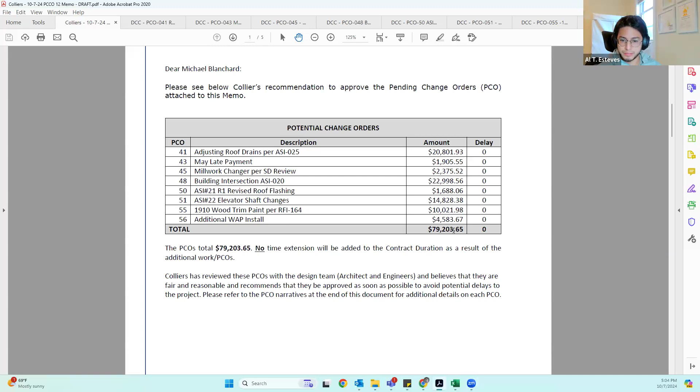There is no time extension associated with these PCOs, and we've reviewed them in depth with the design team, and their engineers were appropriate. We recommend approval to maintain the schedule. In terms of contingency, that 80,000 is about 3% of the contingency. Should all these PCOs be approved as presented tonight, we're looking to have about 1.7 million left in contingency.

Obviously, we have a number of potential PCOs out there that we're still working through, and the total potential exposure is 469,000. Worst case scenario, say those get approved, we're looking at 1.2 to 1.28 million left in contingency, which is about 52% of the original contingency.

Right now, as of August, the contractor is about 56% billed. We actually just received their September invoice, and they're about 68% billed. So the contractor's billed at about 68%, and we're tracking worst case scenario 52% left in contingency.

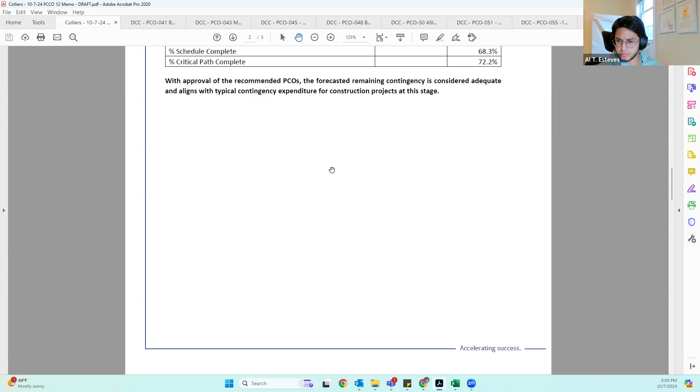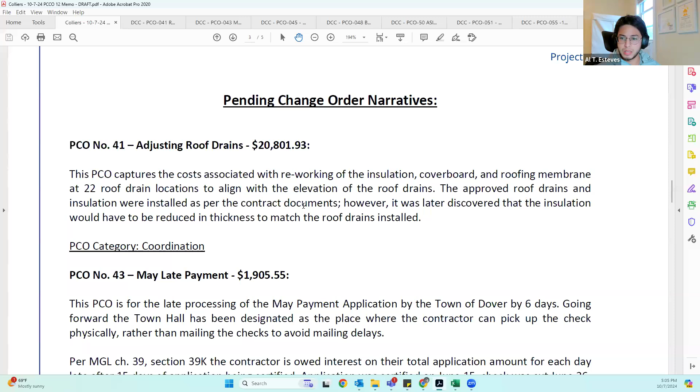So we can go ahead and get started with the first one. This is one that we've been going back and forth on quite a while, and I'm definitely going to need a little bit of help on this. Katie, from yourself, and Igli, I know you've been working on this as well. This is related to the roof drain. It's 20,800, and big picture, this captures the costs associated with reworking the insulation, the cover board, and the roofing membrane around the 22 roof drains, in order for the insulation to align with the roof drains.

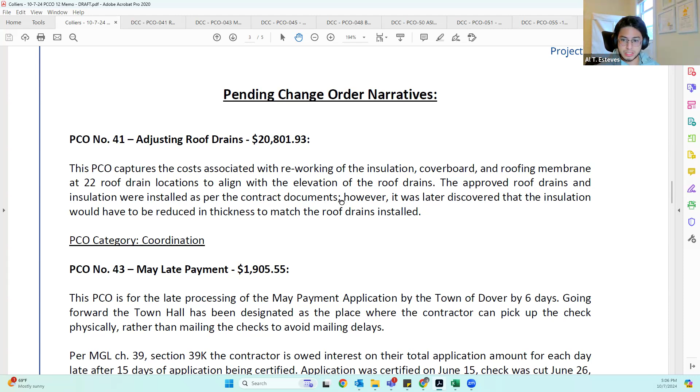So again, there's been a lot of back and forth on this one. Ultimately, the roof drains that were installed were per the contract documents, and the contractor said there was no blocking or anything shown to essentially make up for insulation where it needed to be extended. After the insulation had been installed along with the drains, that's when the team realized that there needed to be some reworking of that insulation. I do have all the PCOs open here, so if you want to dig into details, we can certainly do that. Do we have any questions, or do we need to dig into this one a little bit more?

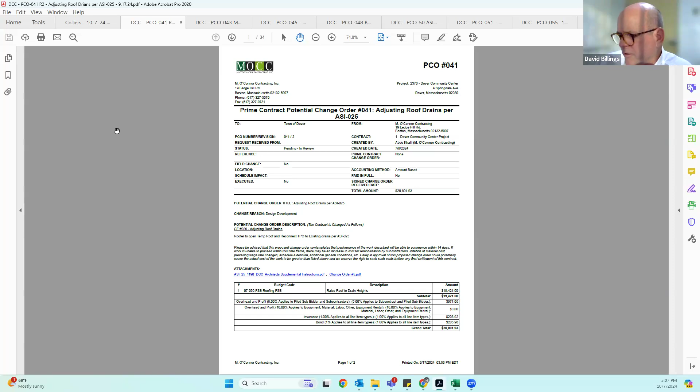I think most of you want to do it one by one or do the questions at the end, Dick? Let's hit these one by one. All right, and I think, of course, Al, if you could kind of elaborate on why this has come about.

Sure. So the contract documents showed the insulation tying into the roof drain, and the roof drains were installed. Then the insulation was installed after that, together with the cover board, and then everything was kind of temped.

The TPO membrane was temped in just to be watertight, knowing that there was going to be some rework because the insulation wasn't aligning with that roof drain. We looked at the option of essentially extending that roof drain rather than reworking the insulation down so those two could meet, but that was more expensive.

And again, this is the contractors arguing that the contract documents did not show any blocking or any mechanism to adjust that roof drain. Their argument is this was built per the contract documents, and those two weren't aligning. There's a lot of history to this one.

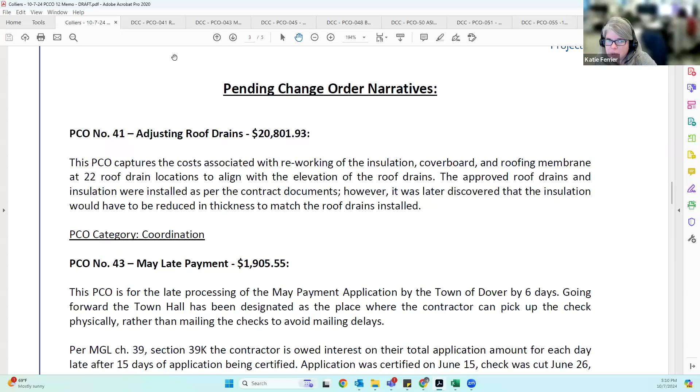Al, did we specify the elevations of the drains, or did we just specify high point, low point? Katie, could you help me with that one? Sure, David, are you asking about a specific elevation within the whole building? Yeah, let's show the detail.

Is the contractor owns coordination of his work. He owns coordination of the insulation and the roofing and the plumbing. So why is this a contractor coordination issue?

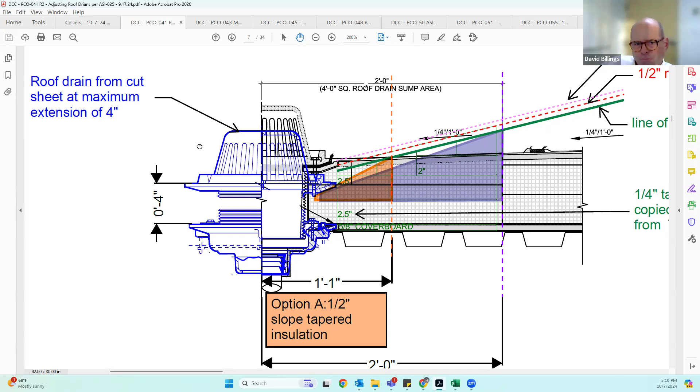So I think there's a couple of things happening, and I'll pick up where Al started. The design detail showed a roof drain that had an extension of 4 inches, so we would have 4 inches adjacent to it, and it would slope just like any other roof slope. Intentionally, the sump area is steeper than the rest of the roof because that helps the water migration.

Everything was submitted for plumbing-wise and installed ahead of the roofing coordination and roofing submittals, so there was a lag in that. There were multiple rounds of back and forth to say, hey, there's some language in the shop drawings that was not aligning with the other drawings. So, as Al said, this went through several rounds of review to figure out what the coordination was.

Ultimately, we had called out a Class A fire exposure rating, which caps the 1/4 inch slope. For our particular project, that's not a requirement, but it has to be for the building. Unfortunately, the testing mechanism requires that slope. So by the time we got to that part of the coordination to figure out that that was not required and the roofer could come back and amend the insulation, the plumbing drains had already been installed.

And the majority of the roofing had, as Al said, been temped out. So ultimately, removing the requirement of the Class A allowed us to have a steeper slope to get to that point. But realistically, the plumber started work well before the roofer, and by the time the coordination happened, there was just a lag in that work.

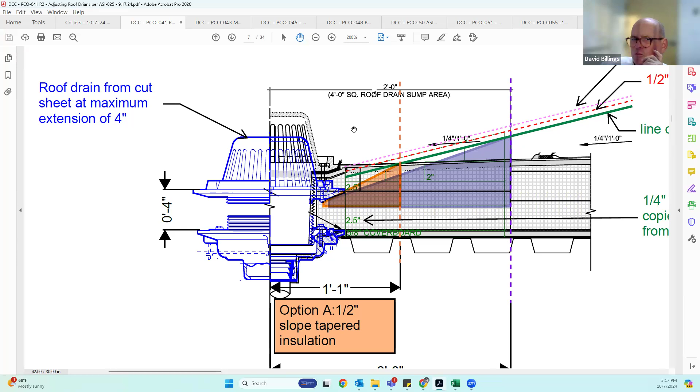I do believe they proceeded with this work just because they absolutely need to keep moving, at risk, knowing that. Let me ask you another question: what exactly are they doing? Are they cutting out the insulation and creating a pan, or are they raising the drain body?

So all the roof drains, I forget exactly what size, but around it that's where you start pitching in a little bit at a steeper slope. They're basically cutting open that TPO again. They have to redo this insulation, it's like a 4-foot by 4-foot area at 22 different locations, redoing the pitch of that insulation. So they're creating a sump, a steeper sump, so that the insulation can tie into the drains that are installed.

So they're not redoing the plumbing, just the height? Correct. We looked at that option instead of reworking all the insulation to extend all the roofing drains, so we could still tie into that insulation. But that was more expensive. It's just a collar extension.

This should be relatively simple, because it's just screws in. So you're saying a collar extension is more expensive than cutting open and redoing the insulation? We did evaluate that option and yes, it was just slightly more. So to answer Dick's question, we did look at this as if this was some roofing work, some plumbing work, or roofing and plumbing work.

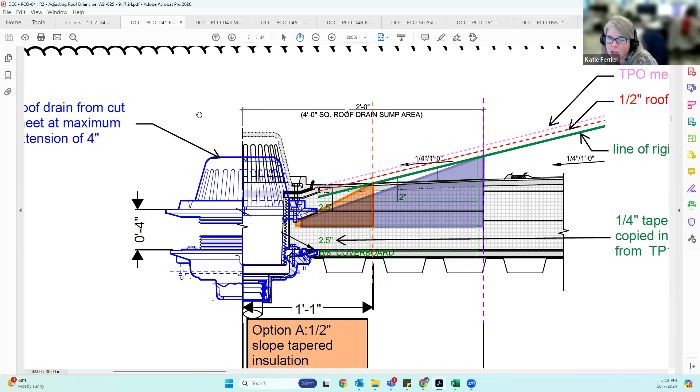And of the options of either additional blocking or an extension to that roof drain, as far as touching all the fittings - there's 11 drains and each drain also has an overflow, so as Al said, there's 22 locations. This one was actually more affordable than the roofing drain extension kit.

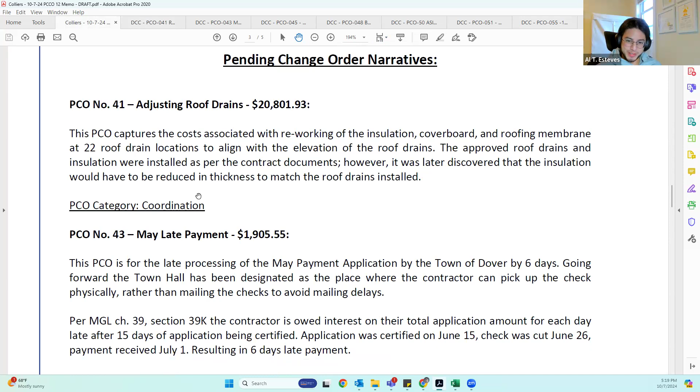Yeah, all right. Some of the other ones will be more straightforward than this one, I promise. Yeah, this one we've been going back and forth on for a while. There's just been a lot to that one.

Any more questions on this one? No. Okay, this one - late payment, $1,900. The contractor first was asking like 5,000, but the dates were incorrect.

After we submitted the invoice, it had been certified and approved, and once it was submitted to the town, my understanding is there was some sort of miscommunication on the town side of things, and it took a little bit longer to get that payment to O'Connor, which is why they're asking for interest on that late payment.

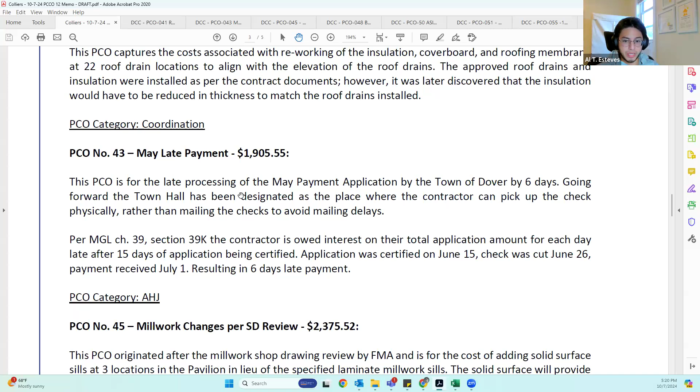To avoid this going forward, what we were doing before was mailing the checks out to the contractor. What we're doing now is establishing a designated place - we can do this per MGL - so the contractor can just come pick up that check as soon as it's cut, so we don't have that delay. I'm also working with the town administrator on the payment schedule to ensure that, based on when the building committee meeting is and when we get it approved, the timelines work.

But we actually reviewed this with Nina, the town legal counsel, and she thinks it's a legitimate change order per MGL. Again, there was some miscommunication on the town side of things - the first time this happened, so I don't foresee this happening again.

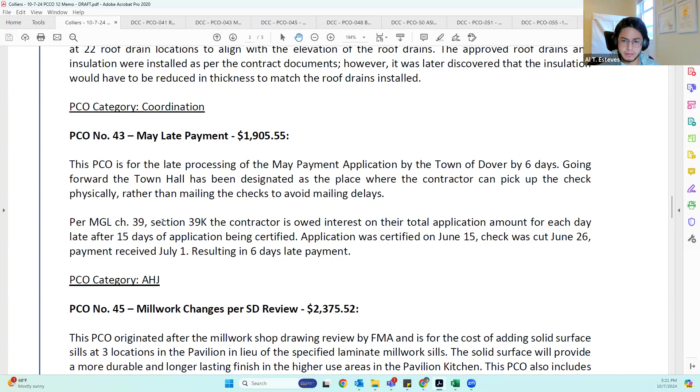So O'Connor's really asking for interest? Yes. What rate are they asking? It's 3% over the bank rate, which is the law. So it's 8.5%.

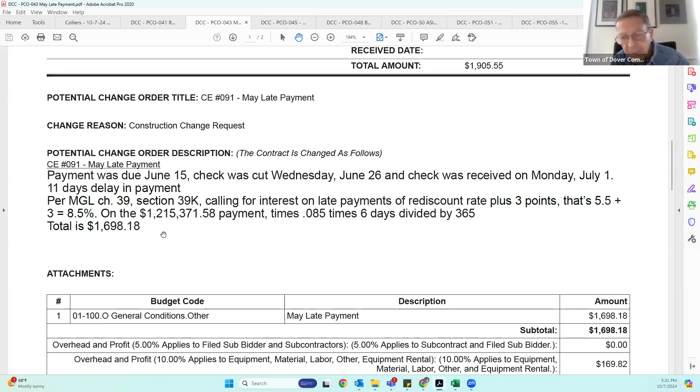Due 15 days after the certification? Correct - certification by the BOS, or... it's actually 15 days, not after the pay app is certified. I thought it was, but I went to read the MGL language - it's 15 days after the final pay app is received.

So we receive it, then we have to review it to make sure they haven't changed anything since we approved it. Then it goes to the architect to get certified. Then it comes to Colliers to process it, to get an approval stamp, and then it goes out to the town.

So we did that entire process in a matter of like 2 days. Then it went over to the town - it goes to the building committee, and then it goes over to the town.

Well, what's the actual act of certification? When does that take place? So the certification happens once we get the draft version - we look at it, give the contractor our comments, they revise it, and then send the final one.

Once they send the final one, we'll look at it again, make sure nothing else has changed, and then the next step will be for it to be certified by the architect.

Okay, so it's like the Prompt Payment Act? Yeah, it is. I usually push back the contractors, file a claim if you want, pay it at the end. We don't want to set a precedent in case we want to dispute some of the change orders.

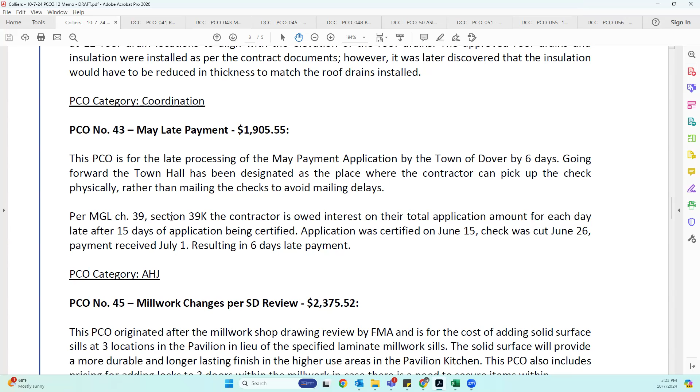Yeah, I thought the town had 30 days to pay. No, but the law gives the state 30 days - municipalities have 15 under the law. But no one does, no one pays it.

It's pretty tough to get this turned around in 15 days. You gotta go through 2 separate committees, plus a procurement process. So if they're gonna be that way, I'd let 'em know. Was it placed in the mail in time? Was it actually put in the mail? No, the delay wasn't because of the mailing. It was getting it approved on the town side and cutting the check that took a bit longer.

Well, I haven't read chapter 39, section 39K, but some of these statutes are a little ambiguous. You think that one is pretty clear, Dave? No, actually, defining exactly what certification means is a little up in the air. It doesn't really state it. Yeah, that's the thing, it doesn't say. I usually say certification is when the town approves it.

Which is after the board of selectmen, but they can dispute it. That's why I tell them, file a claim. If they want to pursue it, they can do that.

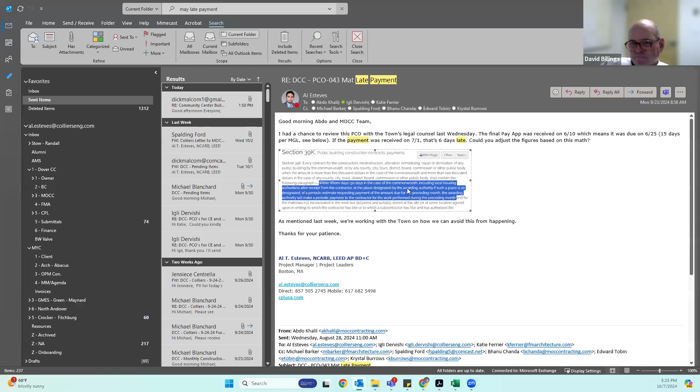So that would be the outside date you'd aim at, when it's actually approved by the selectmen. Well, it doesn't really say that. After receipt from the contractor. So it doesn't say certification, and I thought it was when it was certified, but what it says is after receipt from the contractor. But you gotta approve the receipt. It's when the town approves it. That's what I always do.

Well, it sounds like it's arguable, so if you want to not set a precedent and hold it up, I guess you have an argument. Yeah, we looked at this with Nina, and she thought the contractor was entitled to this interest, but we also probably agreed we owe it - that doesn't mean we give it to them.

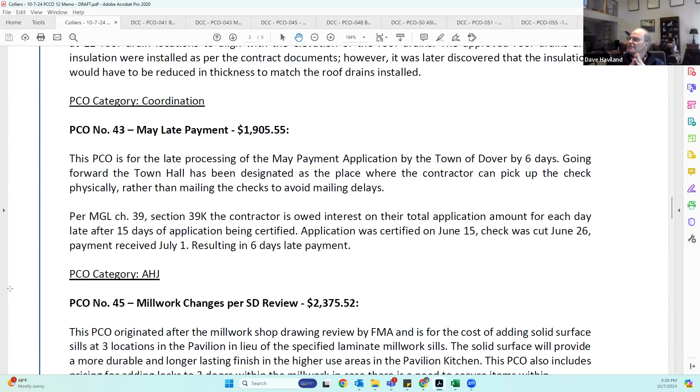Yes, Dave Haviland. It seemed to me that this interest was almost a reaction to our pushing on them on the time, so to me it's more of a tit-for-tat reaction. And I definitely agree we should not be setting a precedent here. If they want this PCO, it certainly isn't going to hold the project up. Yes, I agree it's 1,900, but I don't want them dinging us every time we're 15 minutes late issuing a check, given the fact that it was the summer.

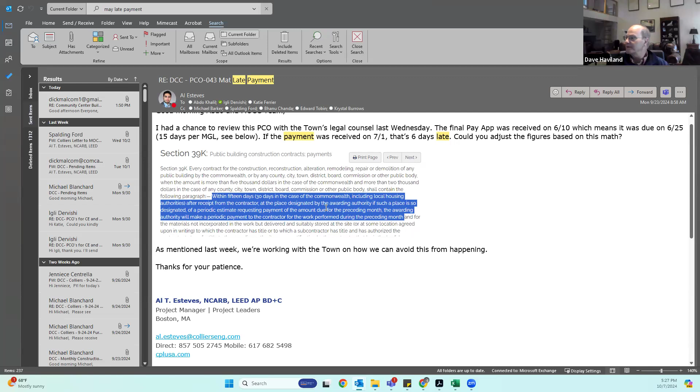There is the review process, and there are 2 committees that have to meet to do this. What I'm interested in is who is the awarding authority under that wording you had up, Al? Is the awarding authority you, the building committee, or the Board of Selectmen? Because if the awarding authority is the Board of Selectmen, we have more time, and the 15-day clock doesn't start until after the awarding authority. I read it really quickly, and here it is again.

Well, we've gotten a couple of different answers. One was that it was certification by the architect. But if we're talking about the BOS, then it would be a later date, right? That's my question, I don't know. Maybe we should reconfirm with Nina.

Nina, as great as she is, there are times when she's busy and she'll just give this a cursory review and say, all right, we owe them interest. But do we? And again, since we're in a dispute of at least several months at this point, I think we just don't pay this until all this goes into one big bucket. This would be in their favor, and we're going to have some in our favor, and let's see where the chips fall. That would be my humble opinion.

Yep, thank you, David. Okay, any more discussion on this, on the PCO 43? No.

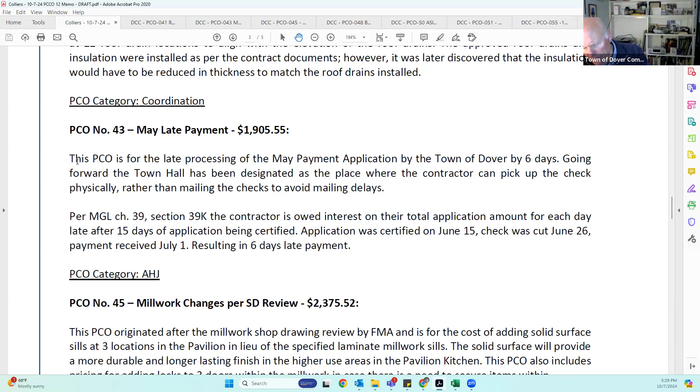So Al, what I want to do is backtrack, and I'd like to vote on each of these separately. Okay, so I'm going to backtrack. Is there a motion to approve PCO 41, adjusting roof drains per ASI 025, in the amount of $20,801.93? Is there a motion?

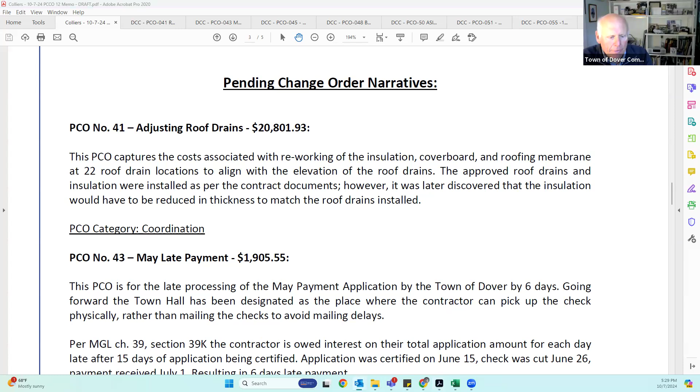Is there a second? Second. Those in favor of the motion, I will poll the board. David Billings, yes. Luciano, yes. Barry, yes. And I am a yes as well.

Okay, now let's go to PCO 43. Is there a motion to recommend for approval PCO 43, May late payment, in the amount of $1,905.55? Is there a motion?

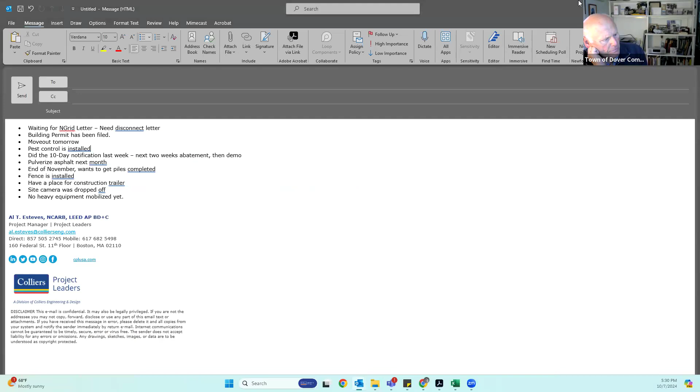I would motion to table it for future action. Is there a second on that? Is that to table? Second. Okay, I will.

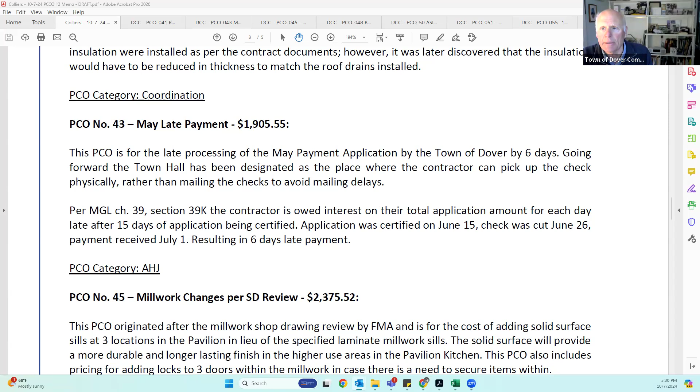We'll have a vote for those in favor of tabling the motion to recommend for approval PCO 43. Poll the board: David Billings, yes. Luciana, yes. Barry, yes. And I am a yes as well. Okay, thank you. Al, next.

Right, next we have PCO 45. This is $2,375, and I categorize this one as an owner request. It's a betterment to the town. Part of it is, after the millwork shop drawings were approved, we're recommending providing solid surface instead of PLAM or plastic laminate at a number of millwork sills. It's a much better product, much better lasting. And then there's also a part of it that it's adding locks to 3 doors to secure items. We can get into more details if we need to.

What is the solid surface? So I can pick this part up, Dick. For the majority of the pavilion space, we have a solid surface at the windowsills, kind of an off-white cream stone. There are 3 locations we had called out as more in line with the rest of the building, which is painted wood. So the majority of the building on the interior has drywall returns and a painted wood windowsill. As part of the shop drawing review, we flagged 3 locations, mostly in the cafe, where we said there's a good chance someone's going to set down a cup of coffee. The painted wood is totally fine, but it will likely need to get wiped up and cleaned. So we thought the solid surface was a reasonable thing to propose as an upgrade.

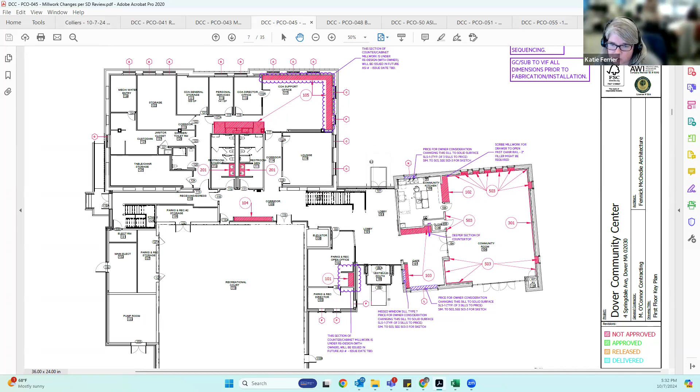So the numbers here would be the delta between painted wood and solid surface. Al, I don't know if you have this PCO open, because I can just point to the plan if that's helpful. Go to page 7 or 8. Yeah, there, that's perfect, thank you. So there's the window within the kitchen at the top of the pavilion, and then the 2 windows in the cafe, facing the fields and also facing the vestibule. Those are the areas, particularly in the cafe, where people are going to be hanging out and sitting, and there's all the millwork, where you have a coffee station or snacks or whatever. So that was part 1 of this PCO, and the second part is the millwork in the cafe.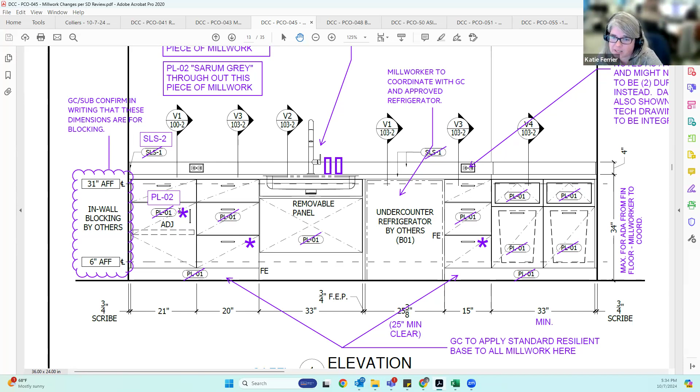All right, thank you, Katie. I assume the solid surface won't get stained by coffee or a wine glass or anything. Good point. We have the solid surface in lots of other places as a countertop surface, so you're right—it's going to be a little bit more durable in the sense of hiding the signs of being used.

Okay, so the solid surface, what is it, is it a stone? Sorry, I don't have a sample in front of me. I believe it's Corian material. It's applied, and it lasts much better, it doesn't delaminate like PLAM, which is sometimes just a layer of plastic on top of MDF. It's a much better product.

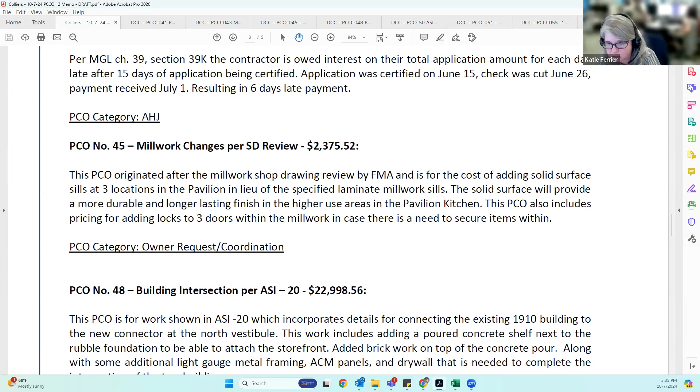I guess in the end, Dick, these are both things we considered a betterment, upgrading the scope we already have. These are recommendations that will help the operations of the building, but otherwise we have all this scope covered. We have millwork actually in fabrication right now, and the window sills will be installed probably in the upcoming months. Okay, good, thank you for picking up on that and making that recommendation.

Any other discussion on PCO 45 millwork changes? Nope, okay, if not...

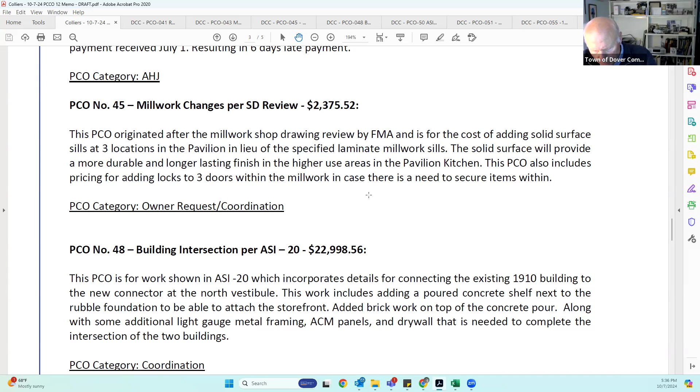Is there a motion to recommend for approval to the Board of Selectmen, PCO 45, millwork changes per SD review in the amount of $2,375.52? Motion, second. Okay, those in favor of the motion, I'll poll the board.

David Billings, yes. Luciana, yes. Barry, yes. And I am a yes as well.

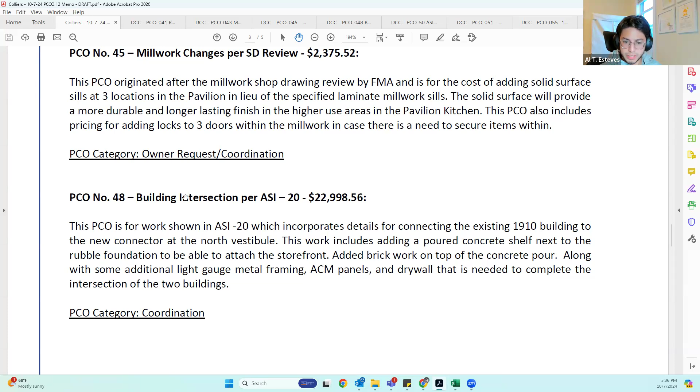Okay, PCO 48. This one resulted from an ASI, an architect supplemental instruction, that clarified the intersection from the 1910 building to the connector piece, specifically at the north vestibule. We can get into the details. The clarifications added concrete that needs to be placed at that fieldstone foundation, plus additional brick, light gauge metal framing, ACM, and drywall to finish that intersection. And the amount is for...

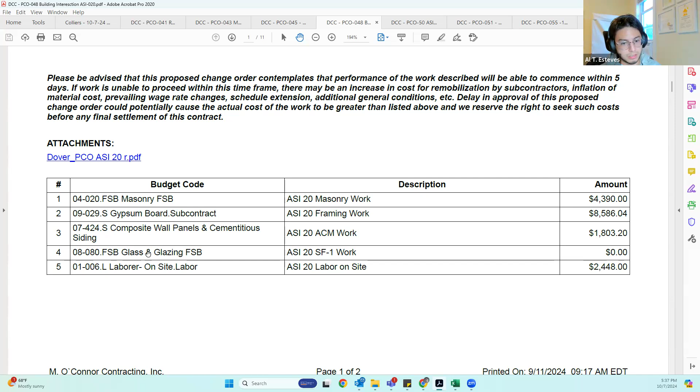$23,000. I can go to that PCO. Like I said, there's a number of trades involved here. We've got the mason, gypsum drywall, the ACM panels, storefront changes, and then concrete work as well.

Let's see if we have a drawing that shows that. I don't know, Katie, if there's a good drawing we can show. If you want to zoom in on the photo on the right of the page, sort of in the middle, within that cloud. Thank you. So, ultimately what you can see is, as I said, we had the rubble foundation, really at grade.

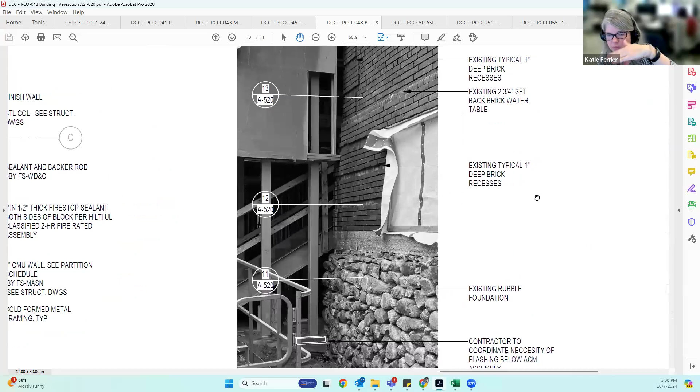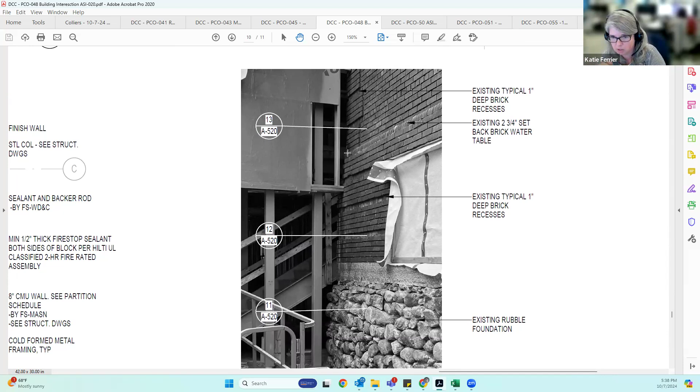Then we get into the granite block, we have the brick, and obviously the brick is corbelling and doing some ins and outs. Then when we get up to about the top of the first floor, second floor, the wall steps back because it goes from four wythes into three. So we also have the water table brick there, which is kind of the curved one. There's a series of different sections, building conditions here, and ultimately we're trying to connect the new construction to the existing building.

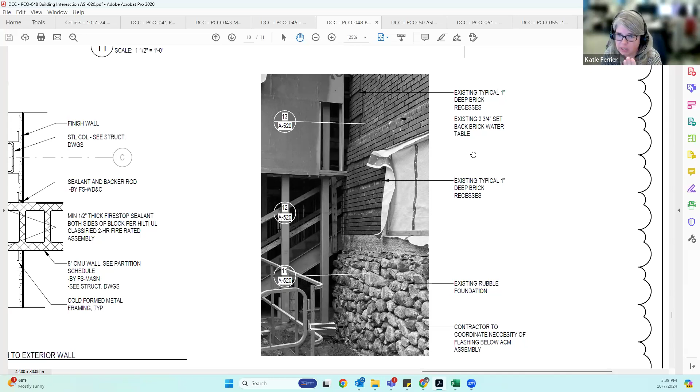Some of this was generally understood based on the previous documents, some of it was better seen once the previous 1970s building was demolished. There were a couple of things attached to this corner, some other concrete walls had been poured on, but ultimately this is just more fussy, detailed work to connect the new building to the existing one, both continuing the envelope and the air barrier, and then continuing it all the way up. So what you don't see in this picture is kind of an extension of the metal panel that goes up, and then tying in that roof detail.

So what we have here, just to the left off this page, is a storefront. We've got glass and doors, and we're trying to connect something very linear and straight with an existing building which has lots of ins and outs. So basically the detailing, there's some concrete being poured at the base to mitigate the rubble, and then additional framing going around to support that. A little bit of ACM metal panel, that's above the storefront system, and the brickwork is really just toothing in some pieces that work within the existing corbels and brick detailing. That's probably what some of these other plan details are, but this photo probably really just shows the condition.

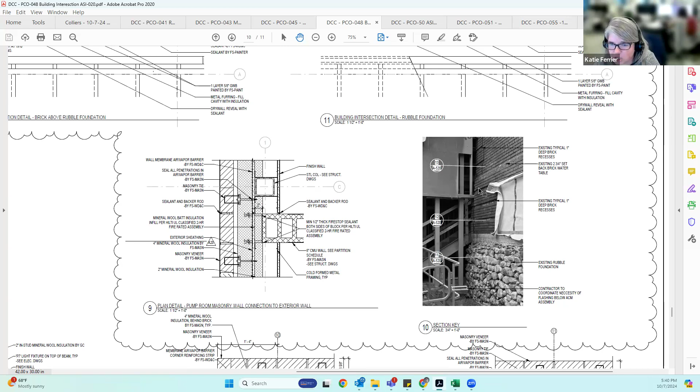So from the contractor standpoint, none of it was shown how to do it on the plan, though they knew they had to tie this in. So all of these you see here are new details issued as part of this ASI. As far as we have storefront scope, repointing the existing building, other details as far as that scope, but there wasn't something as specific as this where we went through all levels to say this is all the ins and outs of what's needed to connect these buildings together.

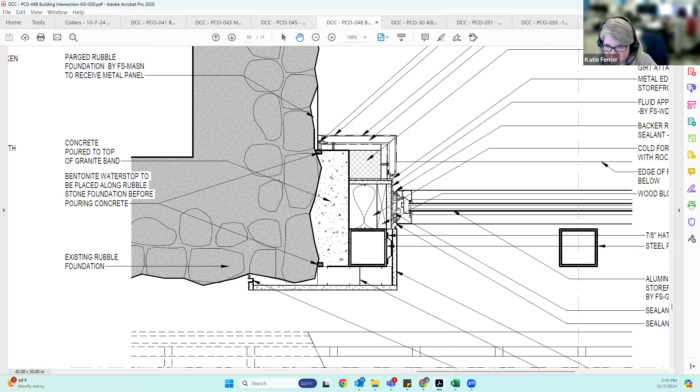So as part of our review, we went through and highlighted the scope that was contract owned, and could eliminate that right off the bat. The pluses and minuses here are more of the fussiness - the metal panel, the storefront, other work, even the drywall.

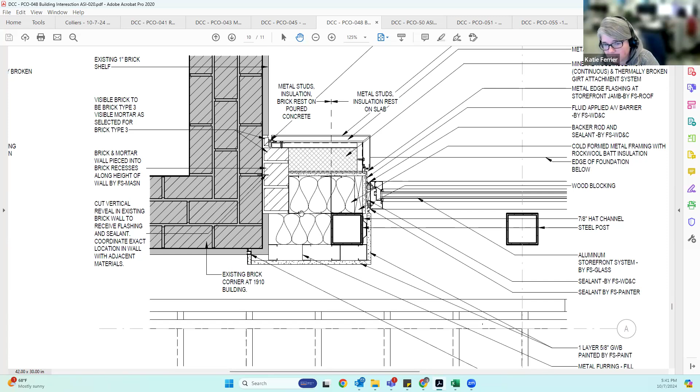A lot of that was contract owned, but some of this is reworking it and really working with the existing condition. So a question to Colliers - in your analysis of this PCO and the 22K or 23K, did you really flush out - I mean, the contractor obviously knew they needed to make a connection.

Was that accounted for in arriving at this number? Yes, 100%. I know Eagle was going back and forth on this one quite a bit, digging more into details with Katie. But that's something we would definitely compare against what's inferable in the drawing, because typically the contractor owns something that's inferable. Part of the exercise is addressing what's inferable from the drawings versus what's legitimately new and added to the scope. I know there was a lot of back and forth on this one. Eagle, if you want to add anything.

Yeah, we went back and forth with them for a number of weeks, going over the details. When they submitted the original scope, we had the subcontractors clarify what they owned on the original drawings, making sure they weren't essentially double dipping from the new work to the old work.

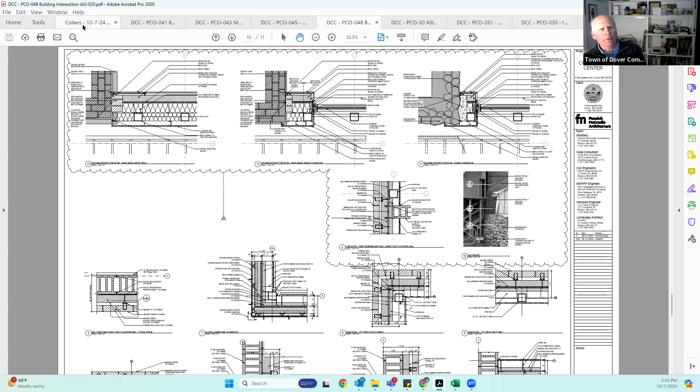Any other questions on this PCO? Okay, hearing none.

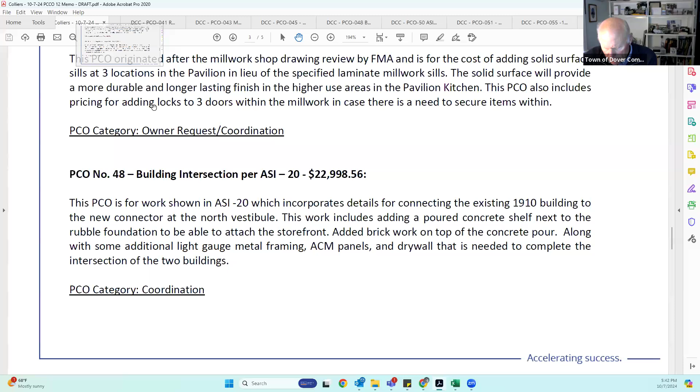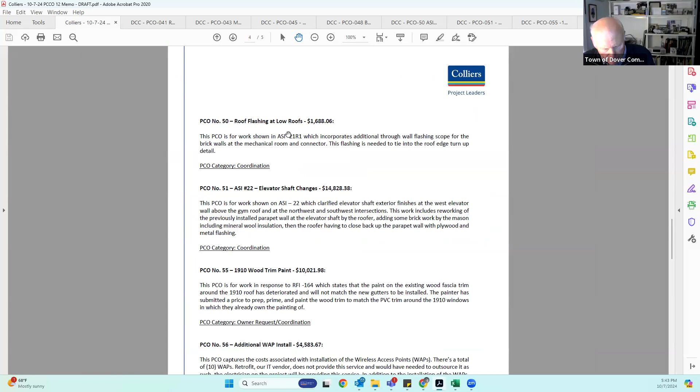Is there a motion to recommend for approval to the selectmen PCO 48, building intersection ASI-020, in the amount of $22,998.56? Is there a motion? Is there a second? Is there a second to the motion?

Second, I can do it. Okay, thank you, thank you, Luciana.

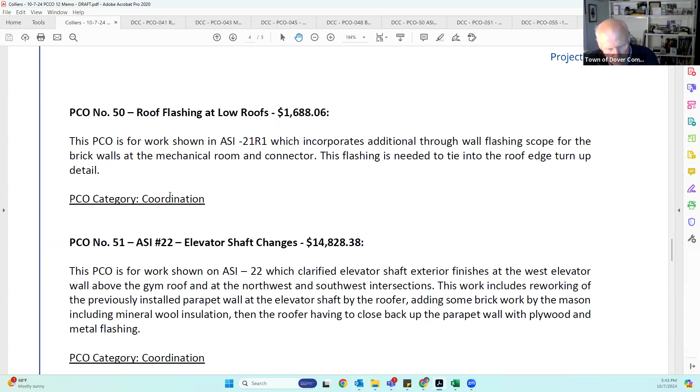Those in favor of the motion, I'll poll the committee. David, yes. Luciana, yes. Barry, yes. And I'm a yes as well. Okay, thank you.

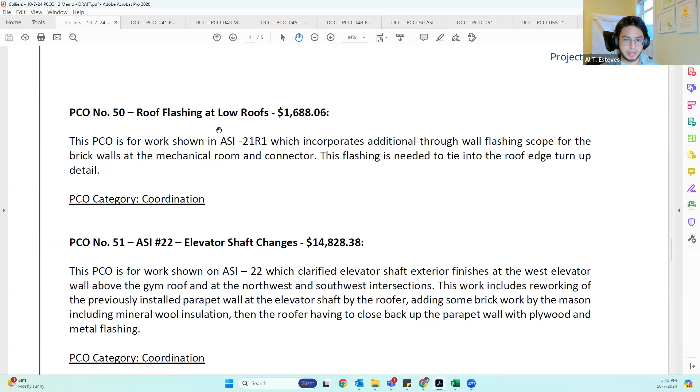PCO 50 - it's for $1,688.06. Essentially, it resulted from ASI 21, which added some through-wall flashing at the brick walls at the mechanical room and the connector. This is needed to tie in the roof edge turn-up detail. Go to that one.

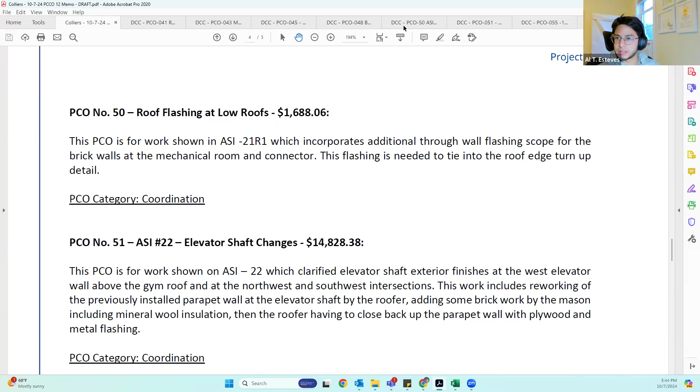So Al, if you go back one page, I can point this out. There you go. At the second section from the right, if you zoom in the middle, there's a cloud around the callout. This is areas of the gym that are tall, adjacent to a low roof.

As far as the typical brick detailing, we've got scope by waterproofing, dampproofing, caulking, additional scope by mason who's doing the majority of through-wall flashing. The revision here is to add a two-piece reglet that connects between those two trades. This is provided by the roofer, and we're handing off to the mason, who mortars it in. So it's some additional labor for them to install the flashing that the roofer is handing them.

In contrast to other details in the building, this is very typical to what you'd have at grade. However, we do have occupied space below, so we wanted to make sure - this is a more sensitive area - that this is a betterment to that detail, upgrading it so it really ties everything in.

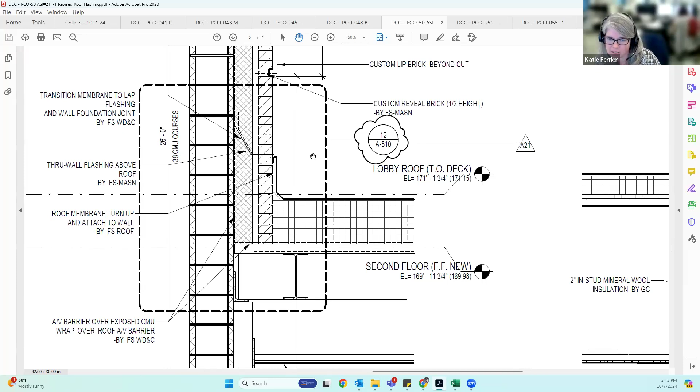On the next page is just a callout of that, but ultimately this is labor - time for the mason to take the reglet from the roofer and mortar it in, as opposed to doing their trades separately. So this is more of a belts and suspenders approach - it is a betterment.

The question came up initially of what's the intent here. We vetted this and believe the scope was owned - there's multiple trades doing some work, and there was a bit of two trades getting to the point of saying, who does the scope in the middle? That's where this two-piece reglet seemed the best fit for this particular area. We don't have a plan here, but as Al said, it's basically either side of the gym, where we have a decent amount of low roof coming up to a higher roof.

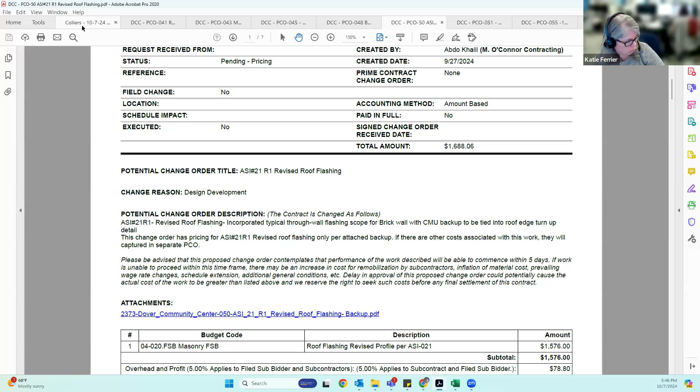Okay, thank you. Any other questions? Okay.

Is there a motion to recommend for approval to the Board of Selectmen PCO 50, ASI number 21, revised roof flashing in the amount of $1,688.06? Is there a motion? Motion. Is there a second? Second. Those in favor of the motion, I will poll the committee.

David Billings, yes. Luciana, yes. Barry, yes. And I'm a yes as well. Thank you.

Okay, Al? The next PCO is PCO 51. That also is a result of an ASI that was issued. ASI 22 is for $14,828.38. This ASI essentially clarified the elevator shaft exterior details above the gym at the northwest and southwest intersections.

And the work included reworking of the previously installed parapet. So there was some rework there at the elevator shaft by the roofer. There's also some work by the mason to add some brick insulation, and then closing the parapet back up with plywood and flashing. That's PCO number 51.

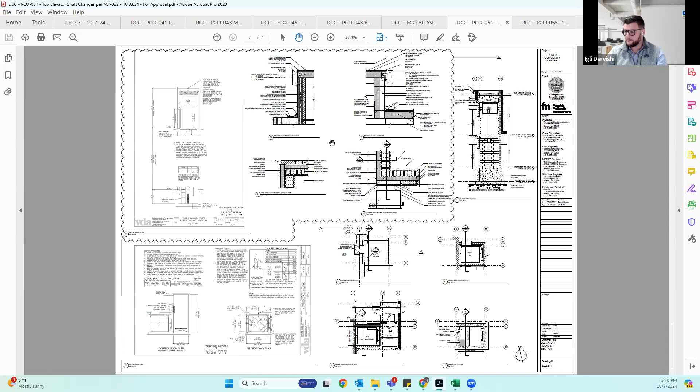Yeah, I guess Al, if you could just zoom in on the area that's clouded. So as you said, all of these are new sections, more specific detailing to show the overlap of various trades. This is the majority of this work, really is the roofer just being able to tie in those connections. So as far as the work that was owned, there was quite a bit of work that's owned as far as the contract scope. What's being shown here is tying in and doing some of the fussy detailing.

I will say on the west elevation, we don't have brick. So in order to really tie the brick, the roofing waterproofing up onto that wall that does not have brick, we did add some framing and some plywood, and then also wrapping that in from the side. So as far as the roofing scope, and this one's a good one, there was a little bit of demolition of the parapet wall that had been built to be able to pull that back and then tie in.

So this is a whole lot of 2D drawings. It's kind of hard to see this in 3D, but really we have the gym wall to the left, the elevator in front of us, and we're trying to connect several connection points and different various slopes in one spot, all around the elevator. It has nothing to do with the actual elevator inside, it's just closing in that shaft.

So my question is, I'm just curious why it wasn't detailed in the original bid set. So I think that we had the majority of the scope covered as far as the typical detailing. I will say the west elevation, I would say, is atypical. We didn't have brick there. It's a short wall just above the gym roof. We didn't have steel there to hold brick. So that's the atypical detail here.

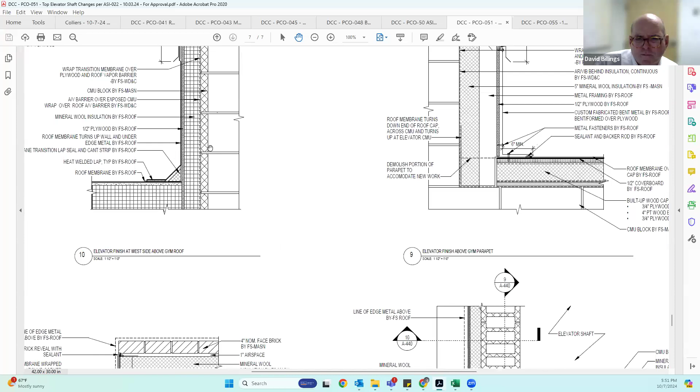And that's exposed to public view? I mean, is that why we got brick, as opposed to just rubber? Good question. So the elevator is just to the east of the gym. So what you're seeing is really just the TPO that's exposed to the gym roof. So it's not really visible, I mean it would be visible to you if you were standing on the roof, but from grade - that I'm asking, why is there brick at all? Why isn't it just wrapped in rubber, or the TPO?

The other three sides of the elevator are wrapped in brick because you can see those from grade. So, let's see - I don't think I have... well, that elevation is in the middle of this view.

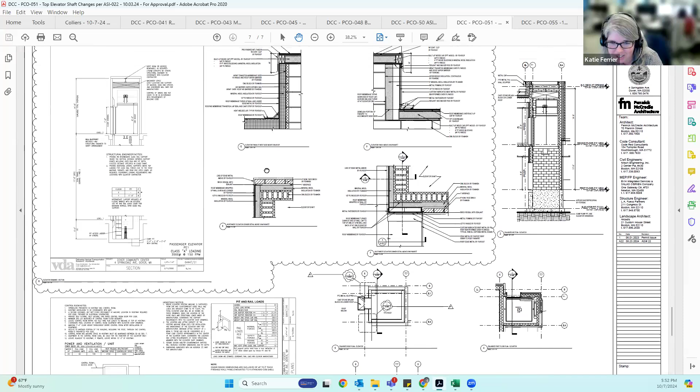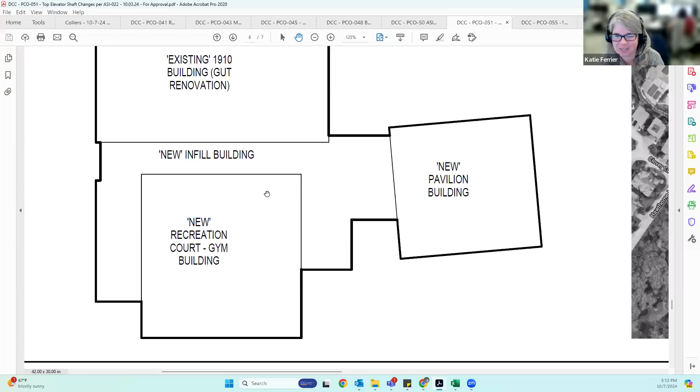Let's go to the floor plan. Go back one page to the cover sheet—it's not quite the right view, but if you zoom in, go up to the perspective view. Sorry, I'm pointing with my hand, not using real words.

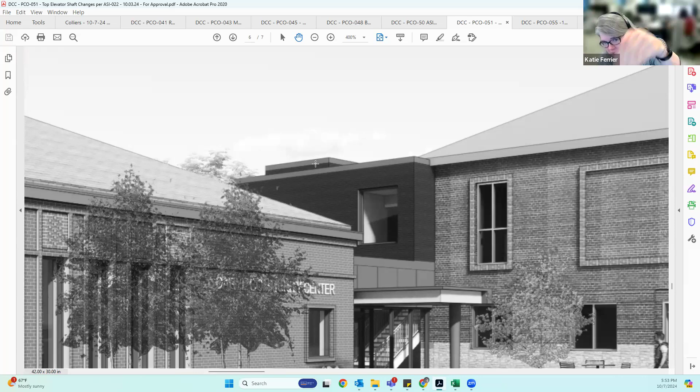If you want to stand in this spot at the end of the project, we'll see it in the rendering. When we're looking at the east side, the west side—which you can't see from here—is the one that doesn't have brick. That's tying into the gym roof on the other side. It's really a lot of planes coming together at one place, trying to tie them all back to the waterproofing.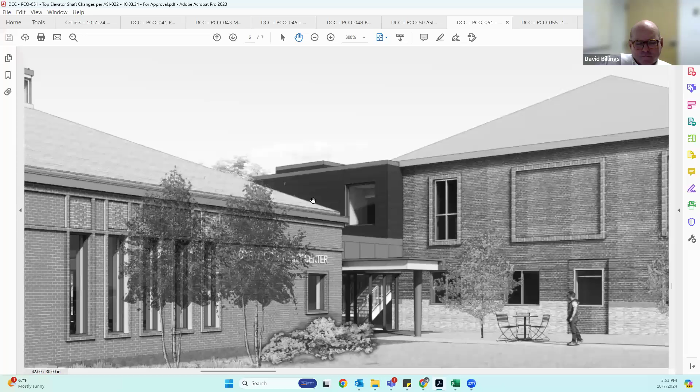Thank you for driving, Al. Oh yeah, they got it.

So this is scope which is not owned by M. O'Connor. We coordinated what's new versus what's not new, because they did own something. So there was a lot of back and forth on that.

Any other discussion on PCO 51? If not, is there a motion to recommend for approval to the Board of Selectmen for PCO 51?

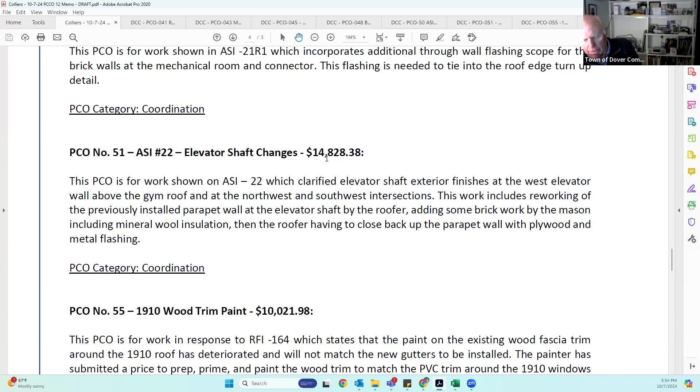ASI number 22, elevator shaft changes in the amount of $14,828.38. Is there a motion? Motion. Is there a second? Second.

Okay, those in favor of the motion, I'll poll the committee. David, yes. Luciano, yes. Barry, yes. And I am a yes as well.

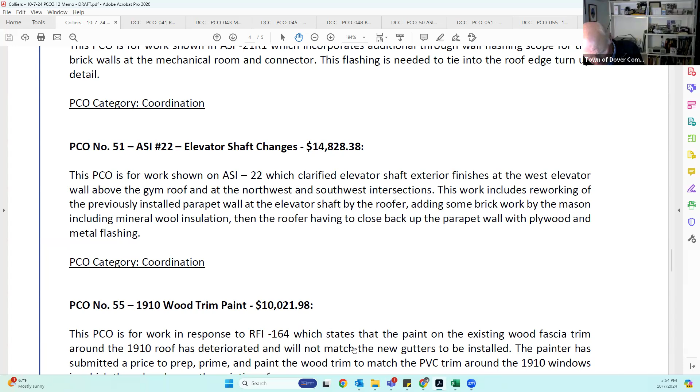Thank you. Okay, Al, next, PCO 55. So PCO 55 is for just over $10,000, associated with the 1910 building. It's around the existing wood fascia trim—it's deteriorated and the color will not match the new gutters that are going to be installed. The project team is recommending prepping, priming, and painting this wood trim to match the new PVC trim around the 1910 windows.

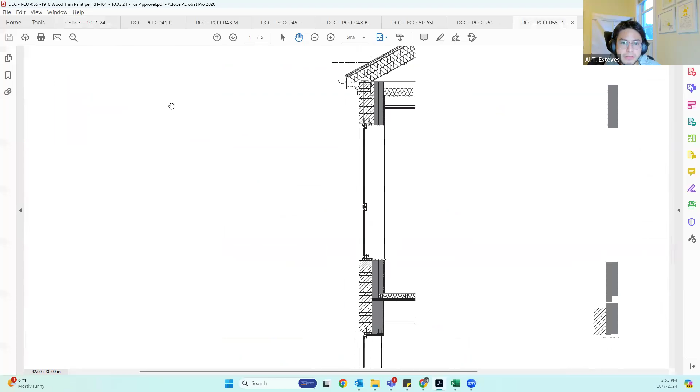We can get into the details. This is going to show what that trim work is—the piece that would be prepped and painted. We didn't have that being painted previously—it was scope we didn't have in the contract set. So you can see it's a new gutter, and we have some new vents in the existing, and we basically amend the existing.

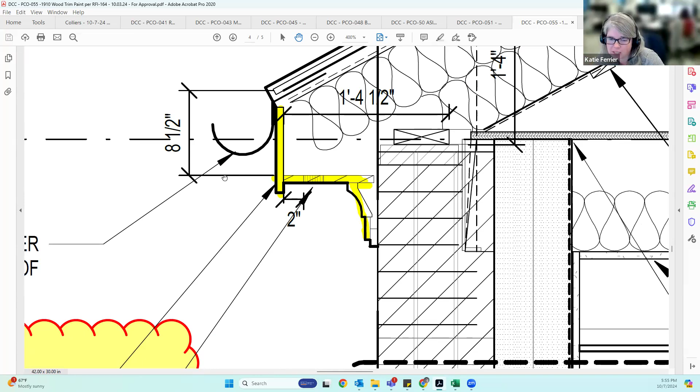But you've got the fascia, the soffit, and the trim that's going along the brick. That's generally the scope, and we have three sides of the building. I think this came from the GC, and it was a good question to ask, hey, before we get too far, are you sure you don't want us to paint this? That's really how this came up.

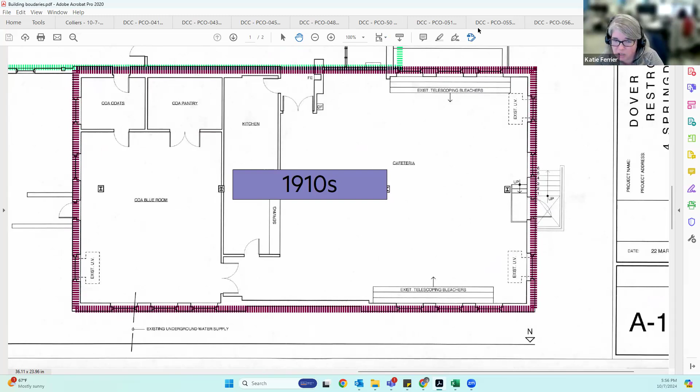As Al said, there's some gutter work, some vents, and other things. Given the scope, I think it was something in the order of 60 man hours for doing the takeoffs with some lifts. It seemed like this is definitely a betterment, and a reasonable time to do that work. I agree—if you're going to touch it, you want to paint it. And if it's part of the bid, if it doesn't call out to be painted, we don't own painting. Correct.

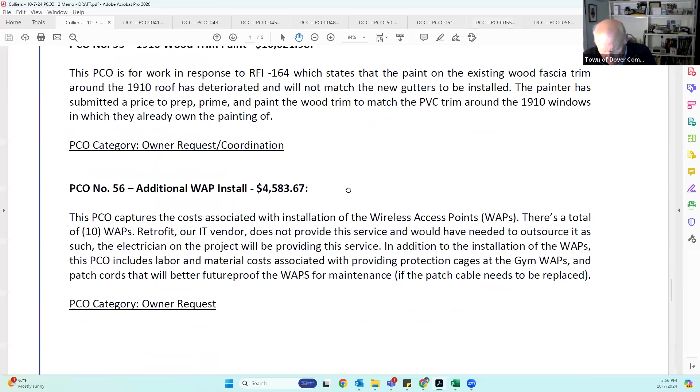Any other discussion on PCO 55? If not, is there a motion to recommend for approval to the Board of Selectmen for PCO 55, 1910 wood trim paint per RFI 164, in the amount of $10,021.98? Is there a motion?

Motion. Is there a second?

Those in favor of the motion, I'll poll the committee. David, yes. Luciana, yes. Barry, yes. And I'm a yes also.

Okay, last one, PCO 56. Yep, PCO 56 is for a WAP, a wireless access point. These are the Wi-Fi routers around the building. There's a total of 10 of them.

During one of the coordination meetings with Retrofit, the IT vendor, with the electrician and the contractor, Retrofit mentioned that they do not own installing the wireless access points, and that's also not a service they provide. They would have to outsource it to somebody else, and rather than bring a third company in, who would probably be more expensive and have to mobilize on a new project, we asked the electrician to see if they could price it.

There are other components to these, not just installation of the wireless access points, but there's a couple of cages to protect the wireless access points that are going to be in the gym, to protect them from basketballs, etc. That was also not owned by Retrofit.

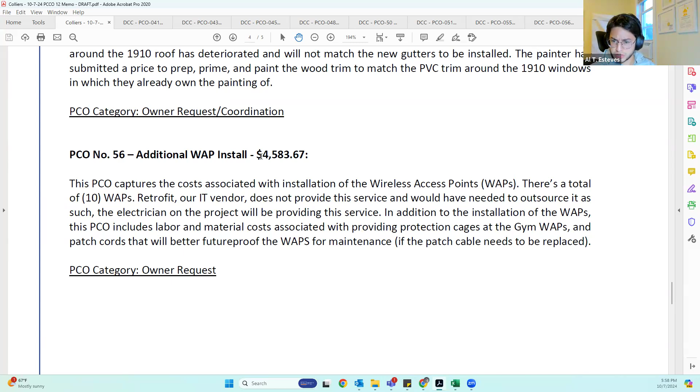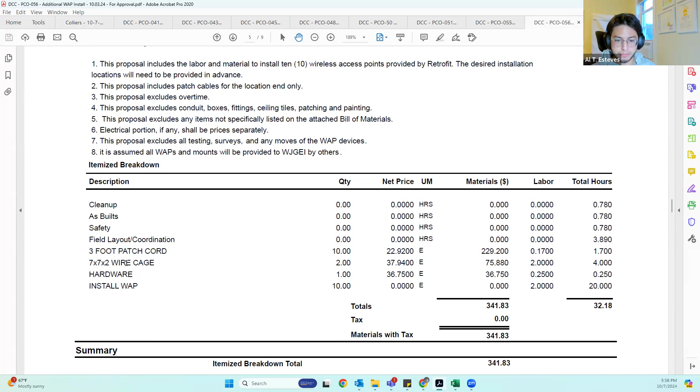So the total is just over $4,500. Here's a breakdown from the electrician, WJ Griffin: cages, patch cables, and installing of the wireless access points.

Were there originally wireless access points specified in the bid documents? Yes, the bid documents show where the wireless access points were going to be, but they were not owned by the contractor. That was always going to be a direct owner vendor scope. Retrofit is providing the wireless access points, they're just not installing them. They are pulling the wire and doing the programming, but this scope wasn't specifically owned by Retrofit, and they also do not provide that installation service.

Isn't it usually that the wiring is done by the electrician? I would have to go back and look at it. I thought the infrastructure was definitely being done by Griffin, and I thought they were doing the pulling of the wires. Yeah, I could go back and confirm that. I've never seen where you have a patch cord to them. I mean, the cable rarely goes bad, but...

So this is not additional. There's 10 access points in the building, we just never bought them. Well, we never bought installation of them. Installation of them, yeah, that's right. Okay.

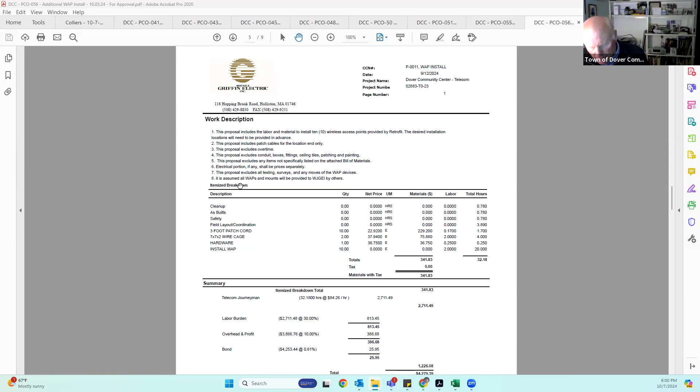Any other discussion on this PCO? If not, is there a motion to recommend for approval to the Board of Selectmen PCO 56, additional wireless access points, in the amount of $4,583.67? Is there a motion? Motion. Is there a second?

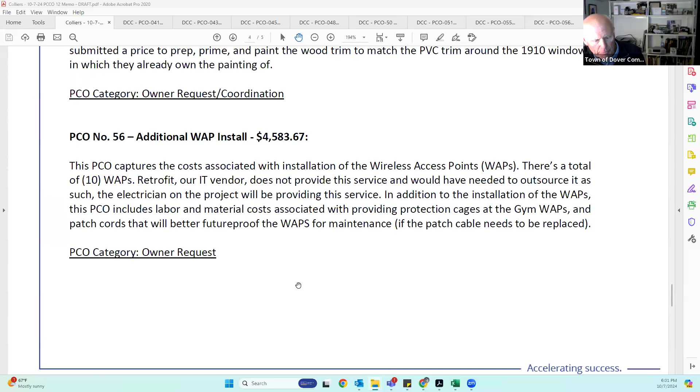Second. Those in favor of the motion, I'll poll the committee. David, yes. Luciana, yes. Barry, yes. And I'm yes also.

Okay, so that's it, now correct me if I'm wrong, Al, but that's it on the PCOs. That's it. Okay, thank you.